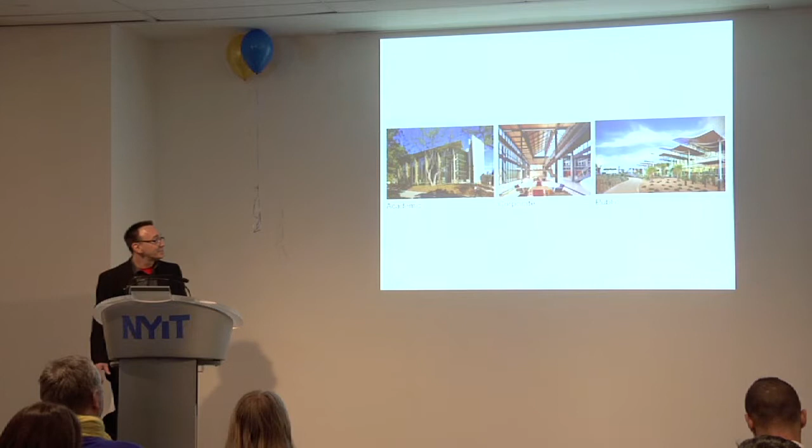Again, back to the main topic, or at least my view into the evolution of glass from an interesting seat that I got to be party to in my career. I started with glass early on, when I first graduated from college. In 91, I started full-time, but I was working at Bohlin, Cywinski, Jackson in 89, 90. Hopefully everyone was born by then.

At that time, in the early 90s, a lot of glass was going high performance: coatings, tintings, frittings. Most of the glass technology being given to the architectural industry was based on automotive products, because glass production, engineering and research go where they sell the most glass, which at that time was the automotive industry. In 97, we started the Rakow Research Library project for the Corning Museum of Glass.

Then during my career, I went from the Rakow Research Library project to work on the Pixar animation studios, and then a bit on the early Apple stores. The Rakow Research Library is an interesting project because it's an adaptive reuse, and it was a really great client to have, especially if you have an interest in glass, because their subject matter is glass. So when you propose a solution to do something interesting with glass, they're a pretty willing participant and interested to have the conversation. If you have curious leanings about glass, they not only are willing to engage in the discussions with you, they can bring some intellectual resources to the discussion.

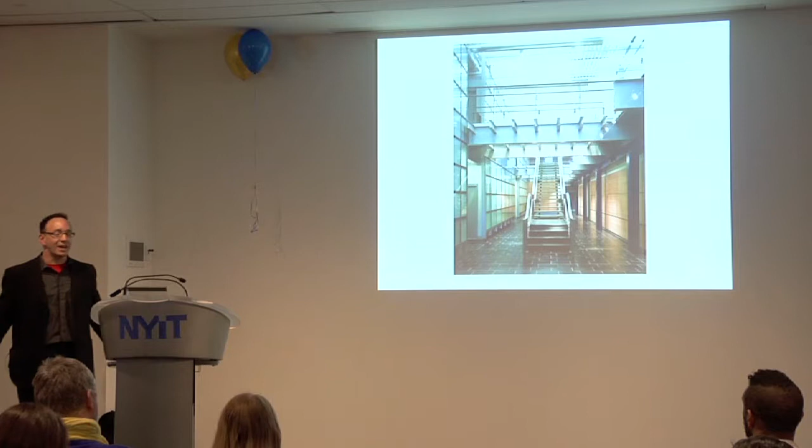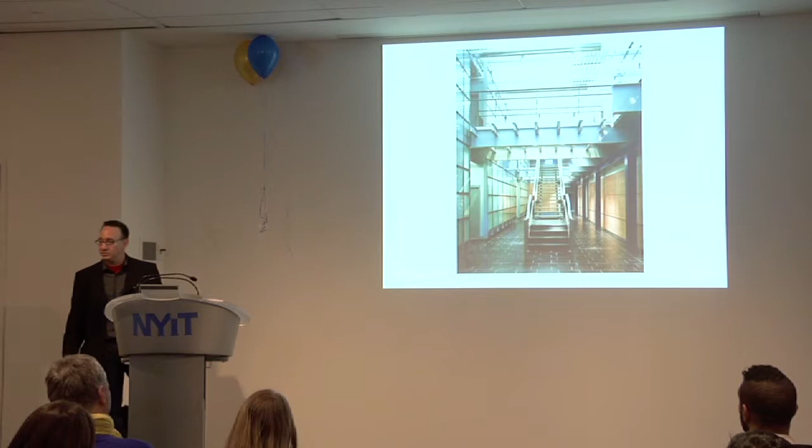We were also going into this 1950s, 60s building that was not, let's say, the highest value when it was built originally. And by the time we got it 30 years later, it was even less valuable. So we did a simple intervention where the things we added were high value and often glass related. The staircase was brought in as a way to, one, talk about their subject matter, and two, bring people up the stairs.

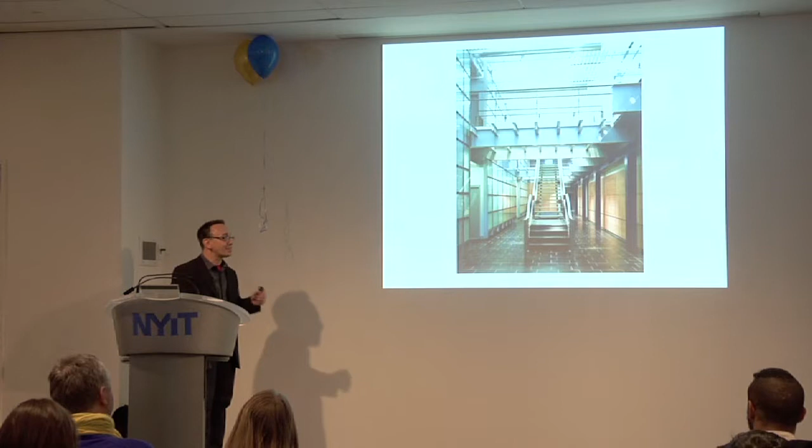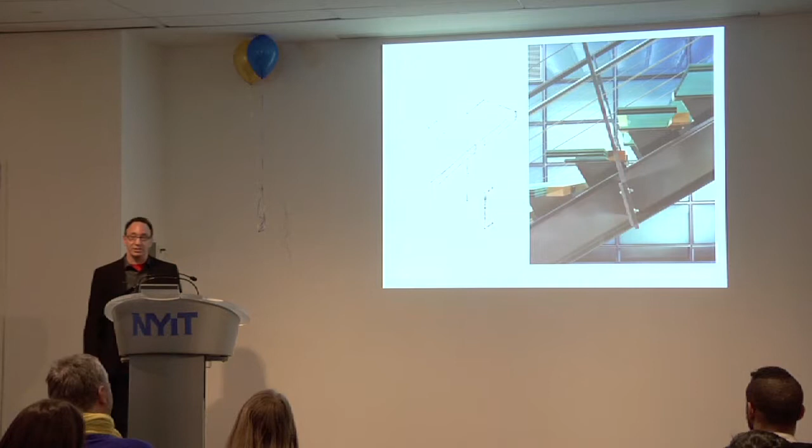We removed what used to be a terrible ACT ceiling. Basically, the scheme is a glass box within a box for the archival spaces. Again, with the subject matter of glass, we looked at how you would execute a glass stair, especially in the mid-90s. The evolution of the technologies we're using today is actually pretty stunning compared to where we were about 15 years ago.

And the willingness of people to do some of the things now with the interlayers and other technologies that allow us to do those Apple stores and other ambitious glass projects you see have been evolving for various other purposes, but have finally now hit a market where there's an awful lot of it available, and it actually is now competitive.

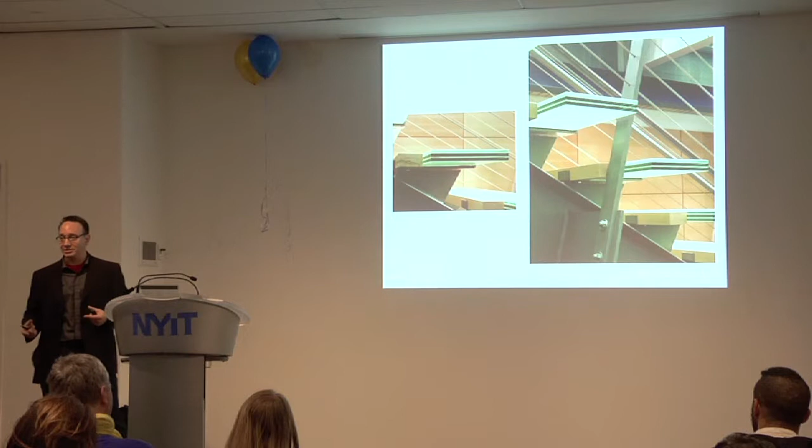In this circumstance, our goal was to have these glass planks cantilever past, so you would see the impact of the subject matter. In this case, it was a simple solution of a wood spacer at the point where you bring the railings past. The planks can be unencumbered, in their pure form. We don't have to cope them, cut them, or do any of those things. And you can celebrate a simple glass laminated plank.

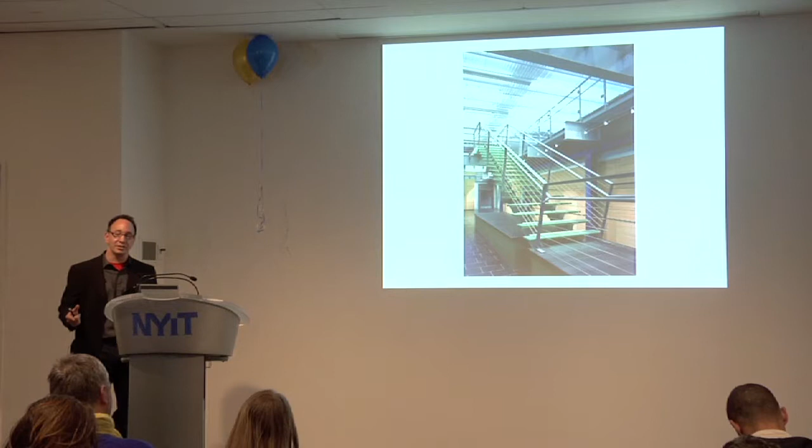Leaves us this unencumbered edge and sort of just this pure, simple form, which is all of the objects that we're putting into the sort of renovation of the project were meant to be sort of crisp and taut and modern glass related.

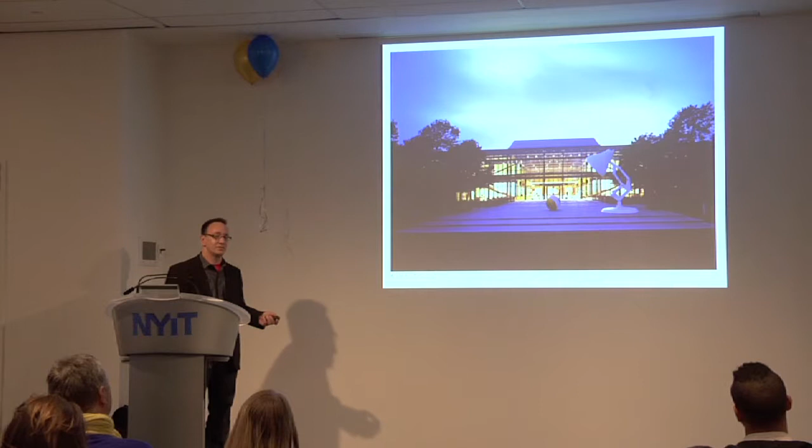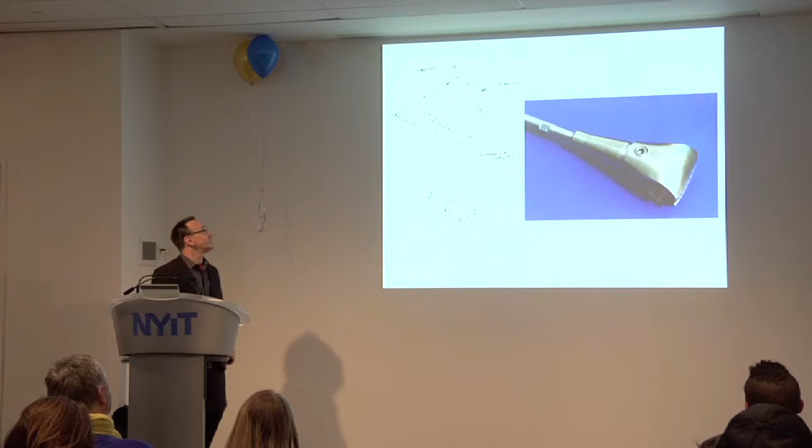The next project, shortly on the heels of that, we were doing the Pixar Animation Studios headquarters in Emeryville. And there was a particular part of the project that was a glass canopy. And at the time, the question was, can you do this in one piece of glass? It's about, if I remember correctly, 12 feet wide by 17 feet long, and in '97, that was not one of the sizes of glass that was commercially available.

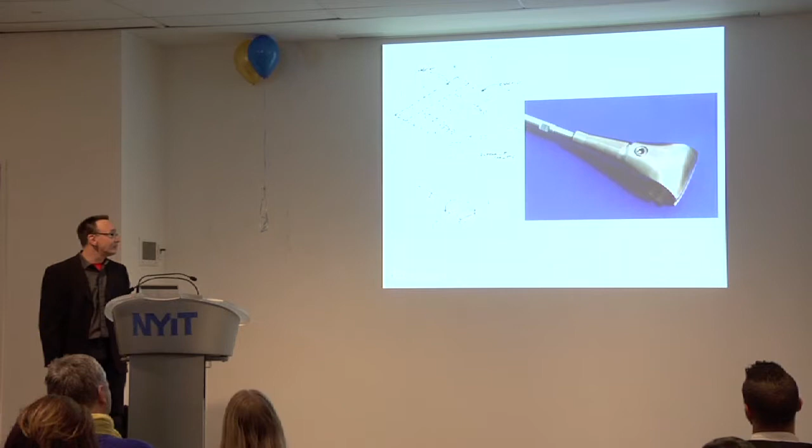So we came up with a little bit of a workaround, a simple solution of using very simple point fittings to just hold the glass, and then a custom fitting to pick the canopy up. Again, just trying to be as clean and simple as possible.

The Rakow project and this project is where we actually started working with James O'Callaghan of Eckersley O'Callaghan. At that time, it was James O'Callaghan of Dewhurst Macfarlane and Partners. And we also were collaborating with Tim Eliassen of TriPyramid Structures. I've had the good fortune of working with both of them for the last 15 years on various projects, both on the Apple side and some of the other projects that I've had the opportunity to work on.

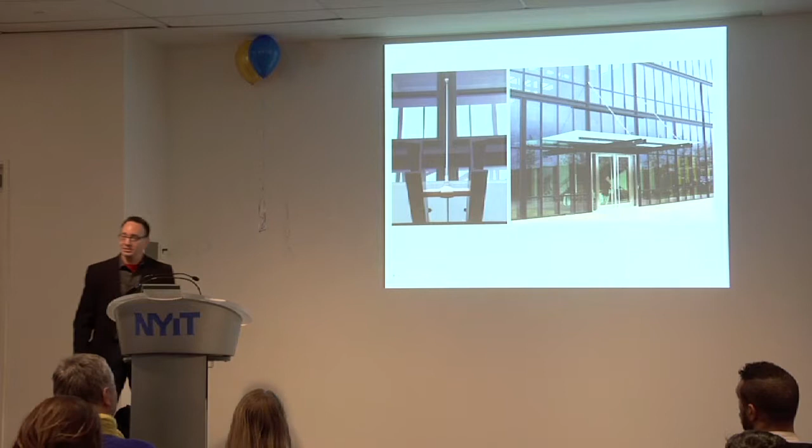Again, it's just a very simple solution, and in this view, it actually looks like it's one big piece of glass, which was the goal. Now you could actually just buy that piece of glass and do it with 4 points and be done, but in '97, that wasn't really available.

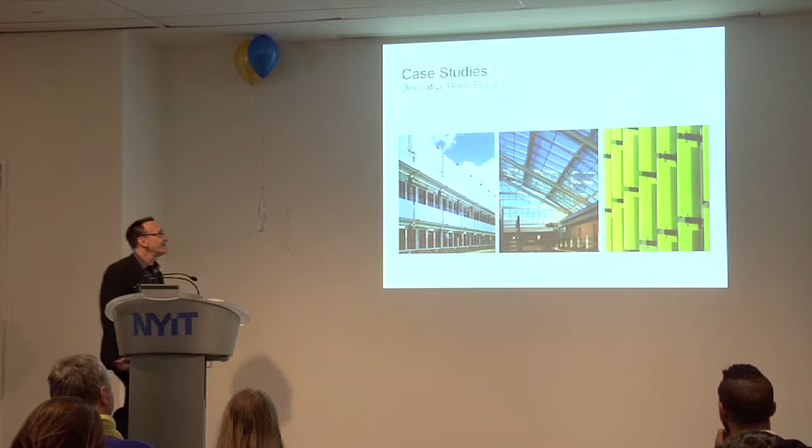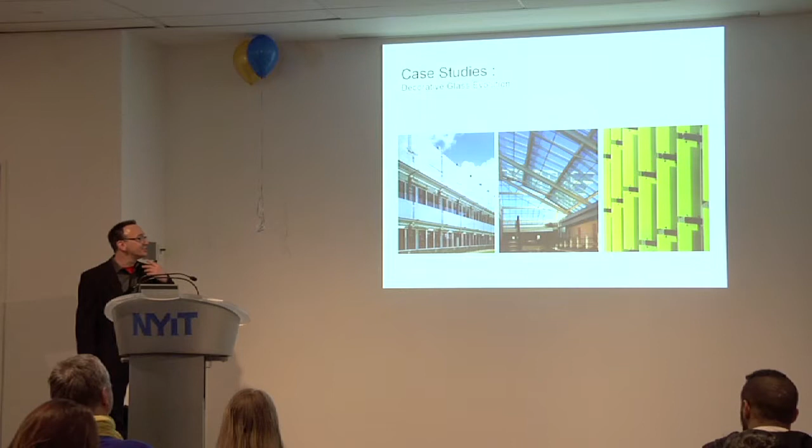So that brings me to probably the more focused part of the talk. Those projects, and certainly the Apple program, are sort of the transparent part of our practice. There's a lot of invisible buildings that we work on, cubes, cylinders, houses. But part of it is the visible glass or decorative glass version, which has its own interesting evolutions too. Again, the Rakow Research Library project.

And here's a question I'd like to ask. Does everyone know how you count the surfaces of glass in a window? Does anyone know? Brigham, you better know. Go ahead, Ed. When you point your finger at the glass and see how often it reflects. Okay.

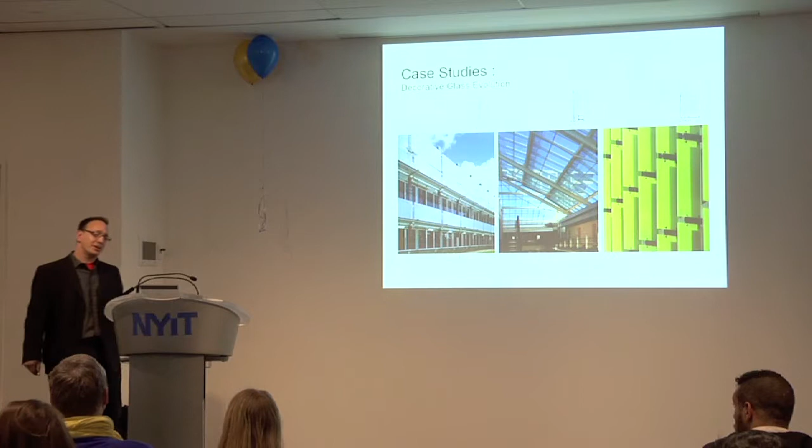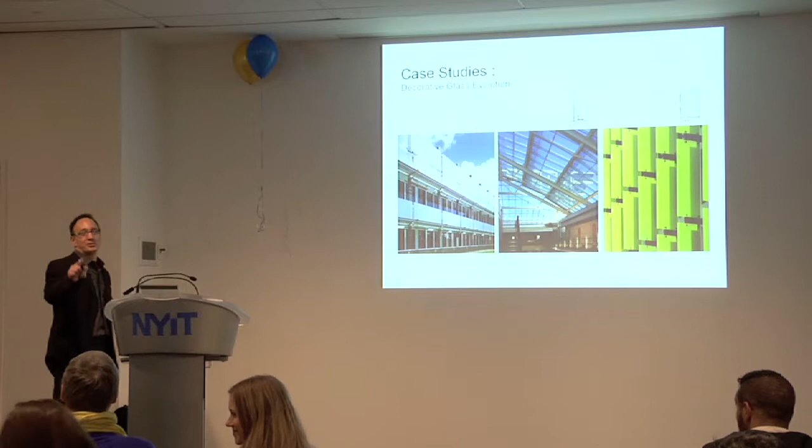Not quite as good at the grades that you gave. Yeah, it's true. When I tried that in your class, I don't think I got that one right either, though.

So if you're looking at glass, insulated units, laminated, or monolithic, you count from the outside in. So this is kind of fundamental because I'm going to be talking about the different surfaces of glass for the rest of this presentation, so it's kind of a key thing to know.

I actually gave this lecture, Brigham, you'll get a kick out of this, in one of our own offices that do a lot of ambitious glass. And at the end of the discussion, someone came and said, "Oh, I didn't really realize you counted from outside in." I'm like, "You've been sitting here for 45 minutes. You just didn't ask." So I've thrown this in.

You count from the outside in. First surface is exposed to the outside. Second surface can be exposed to the inside in monolithic in a standard window or laminated skylight, first, second. And usually if this is a single layer of 6 mm, quarter-inch glass, it's 3 and 4. These sandwiches obviously can grow and become more developed depending on how many laminate layers you put in, whether you have triple insulated. There's a lot more complexity and sophistication in it.

And the question that came up that started with this one, the Rakow Research Library, and continued through all of these projects is, if you want to treat both sides of the glass, how can you do that?

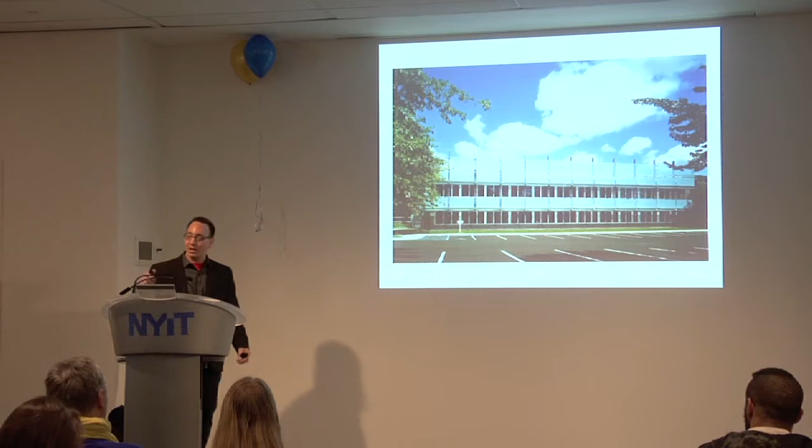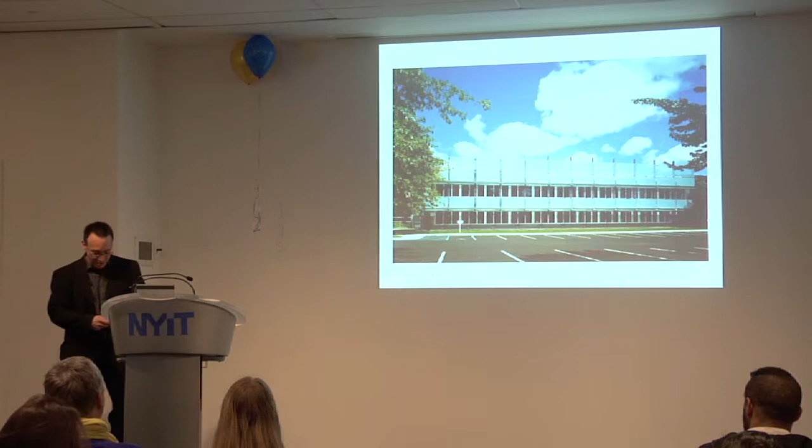So the question is, when posed in a certain way, if you say, I'd like to frit both sides of the glass, the immediate answer you get is, well, you can't. Okay. The question is, why? So Frank Grauman, a principal in our Philadelphia office who worked on this project with me, described it this way.

Well, you can't frit both sides of the glass because that would be like trying to make a pizza with sauce on both sides. Right? It goes through the oven. So to get the second layer, you can frit the first side, but you have to acid etch or treat the back side in another way. Now, and this was in '97, most clients will not typically accept, or most glass manufacturers, fabricators, whatever you want to call them, will not usually warrant something that's exposed in those methodologies.

There are now coatings that if you acid etch or sandblast or do these other treatments you will apply them, but they often will need to be reapplied. Most people are not as interested in taking the risk for a long-term building to have that sort of liability out there hanging on a 120-foot long building, 4 stories tall, 100 stories tall, whatever.

But if you ask the question in another way, and you're talking to people who actually make glass for a living and have a lot of intellectual property rights, you can have a discussion about, would you mind if we frit the front and etch the back to do a custom piece of solar shading device? And that's basically what these panels are. We did both empirical and mathematical equations to figure out how we were going to space these lines.

And as this diagram is indicating, the goal is that the sun can't see into the books, and the people can look through the windows out to the view. Pretty simple parti. Except we wanted it to be progressive, and we also wanted to see the sky. So we calculated the panels. We did mathematical testing, and then we actually built 12 by 12s in our own office with paint and tape, because we're clever. It was a big weekend at the office, trust me.

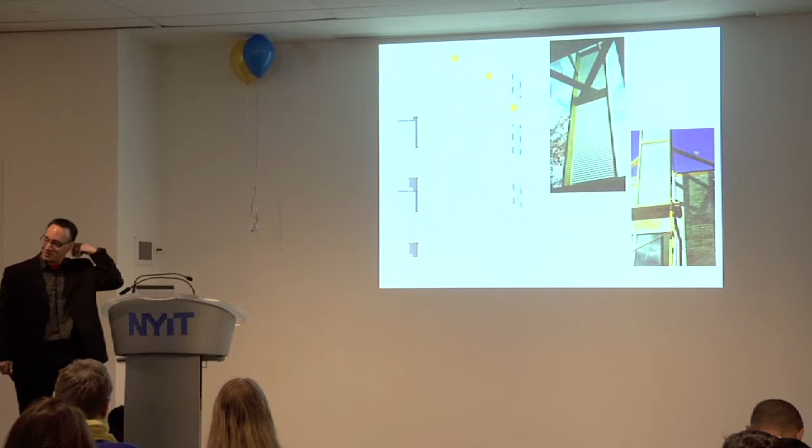And you hold them up, and then you're walking around, and you have sun, and then you put lights on them, and you try all these interesting things. Sometimes late into the evening, which then leads you to other interesting thoughts.

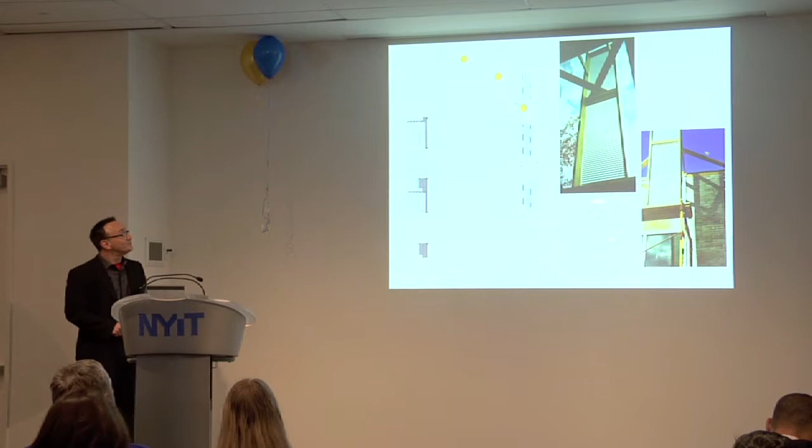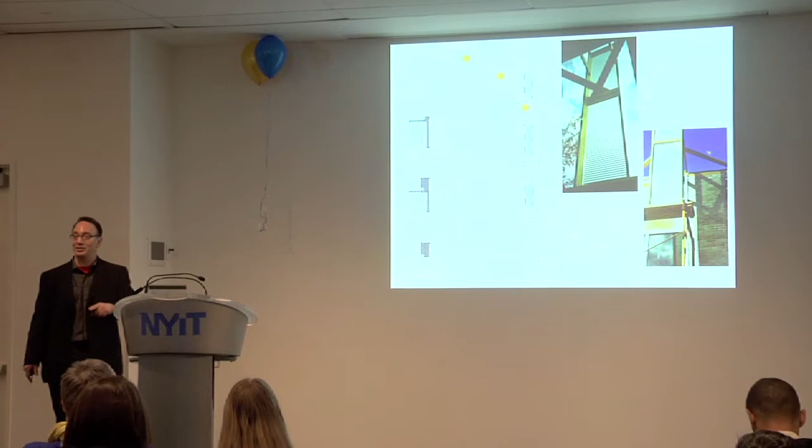But once we thought we got it right, and we did those mathematical equations, with a very long string of decimal points figuring out how exact we were going to make these, we had 3 of them made and installed exactly where they'd go, to truly mock it up. Because what I've truly learned, if you're going to do something with glass, having full-size mock-ups, at least a swath of it, is critical, because you can never really predict exactly how that glass is going to perform.

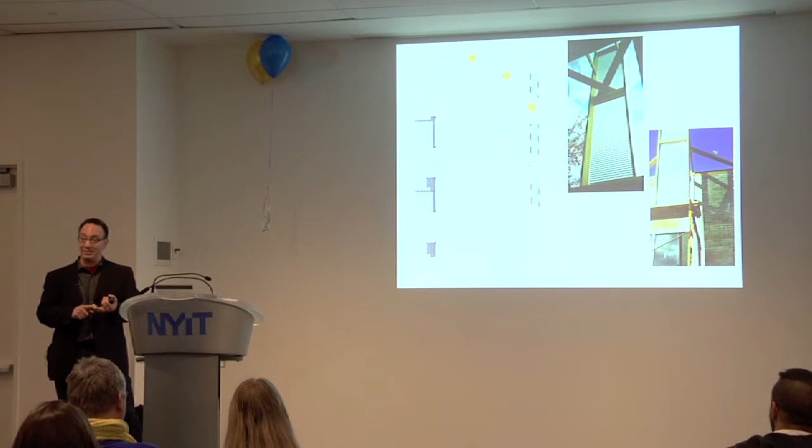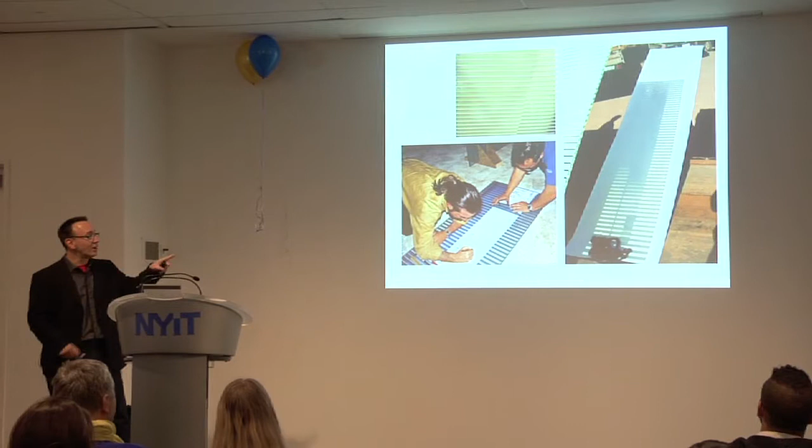Just the color in different regular annealed glasses and low iron glasses is stunning if you put big pieces of them next to each other. So it did not work the first time. They could not fabricate the panels to the tight tolerances we were exacting from them, because when you do a 12-foot stencil on a 12-foot piece of glass that's 6 feet tall, and you pull it on both ends, the fabric stretches, so then it waves. So then the lines don't align, and it's also not repeated on each one.

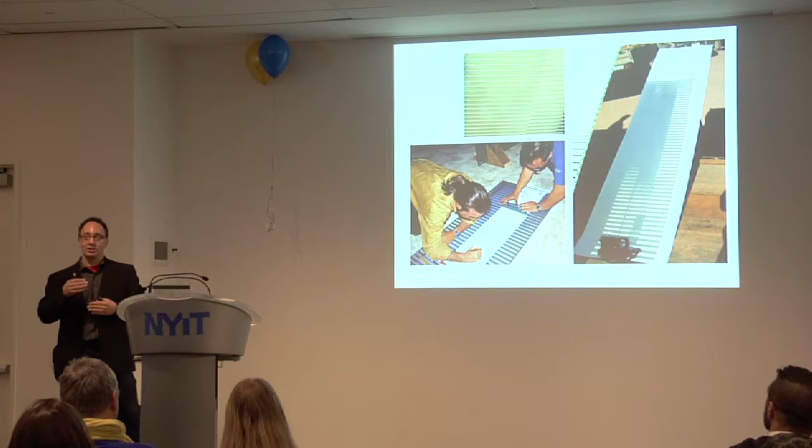So two things we learned. One, that was a problem that we didn't anticipate at all. And two, we needed to give a little more breathing room tolerance for the lines and get them to overlap. Our exact perfect application in real life needed to have more tolerance built into it for fabrication, installation, and just human nature.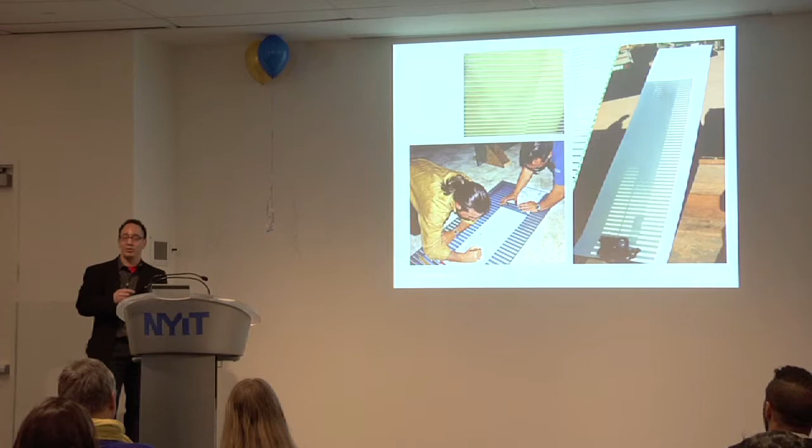So this is a much younger version of myself and colleague Steve Chato, principal in San Francisco.

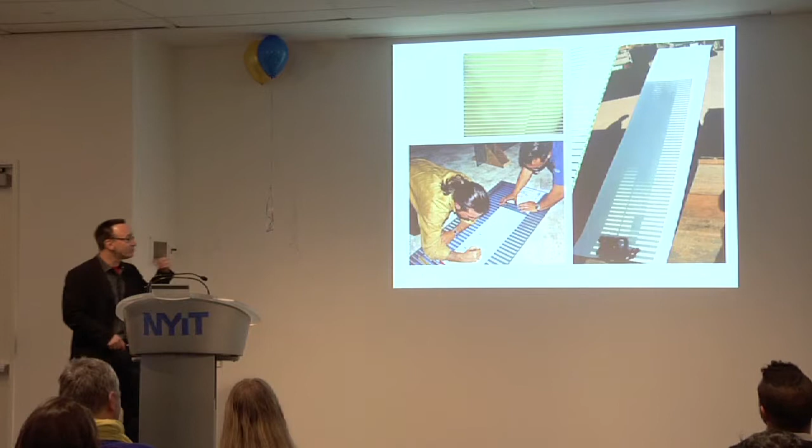We're basically using the glass as a shop drawing where we want the new lines on it and saying, hey, can you make one of these? So they did. And then we went out, put this on the back of a truck, and drove around in Calgary in April, which is like going to find winter and praying for the sun. And it did actually work. You get this moving, this simulates the original. This one is the A panel, and this is the B panel.

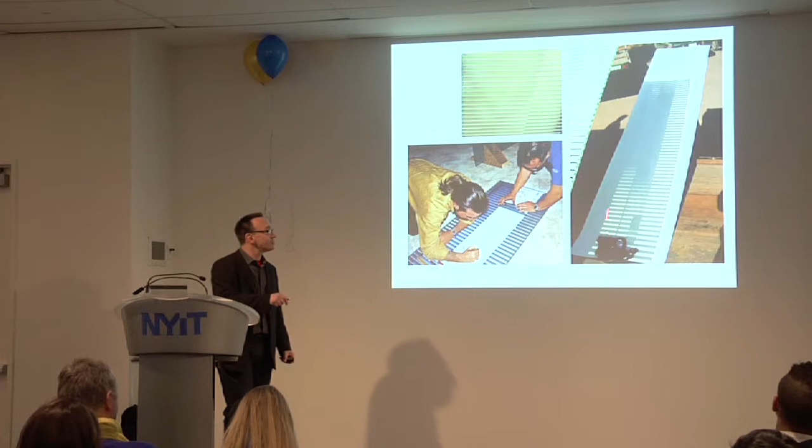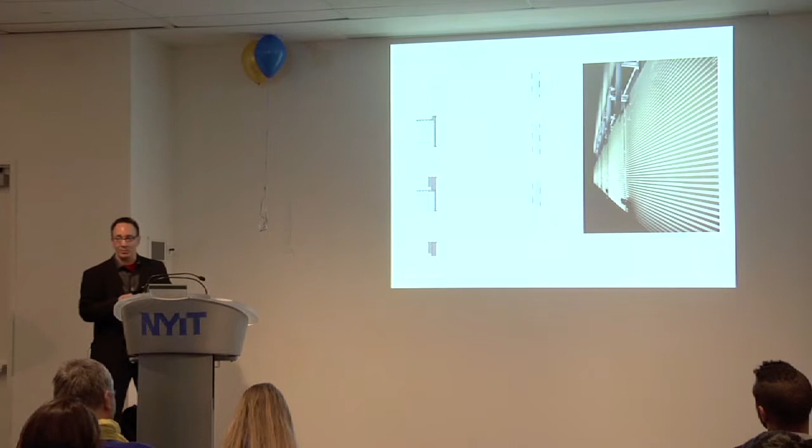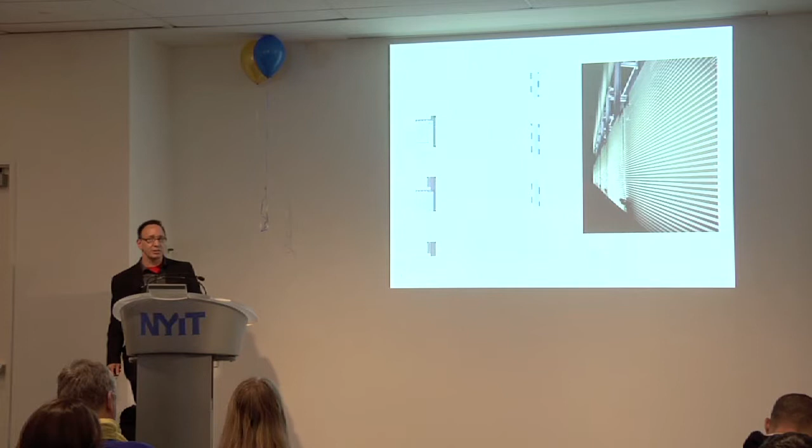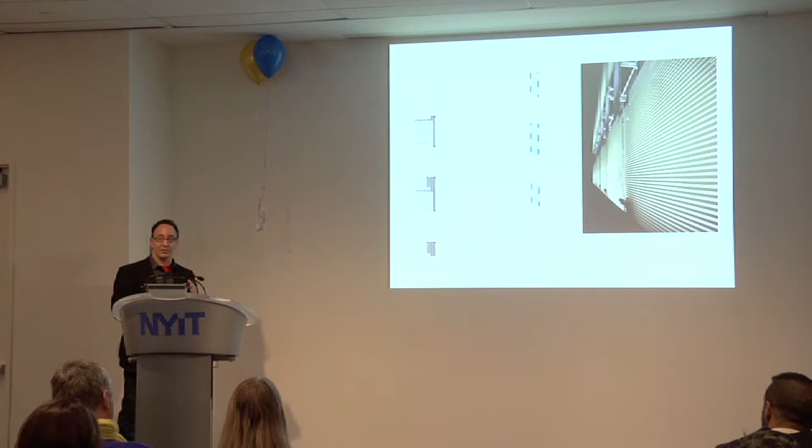We also then looked at the various math and equations and worked to figure out what is the optimum line spacing, because that shadow, as you saw in this image, will not cover the entire 5-foot window throughout the whole day. But you figure out what is its maximum shading, and you live with the margin of sun that comes through it. And we then looked at, well, the other impact of the screen wall is actually backlighting at night, so it becomes a lantern in the landscape. So we basically optimized the angles based on where we would set the lights and worked those math equations back and forth until we hit what we thought was a pretty good compromise.

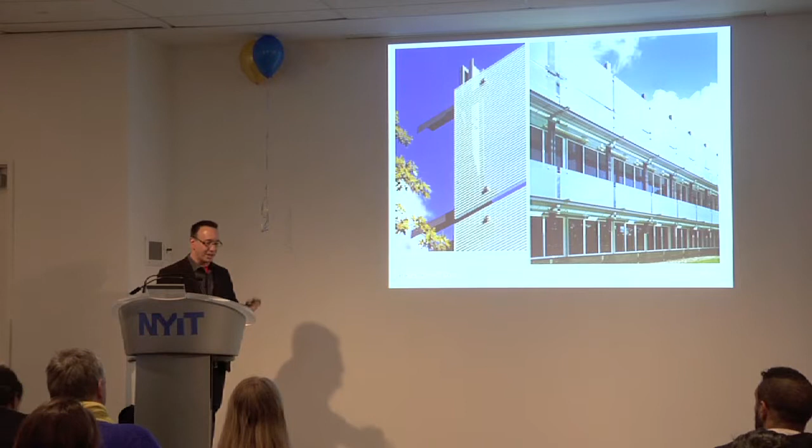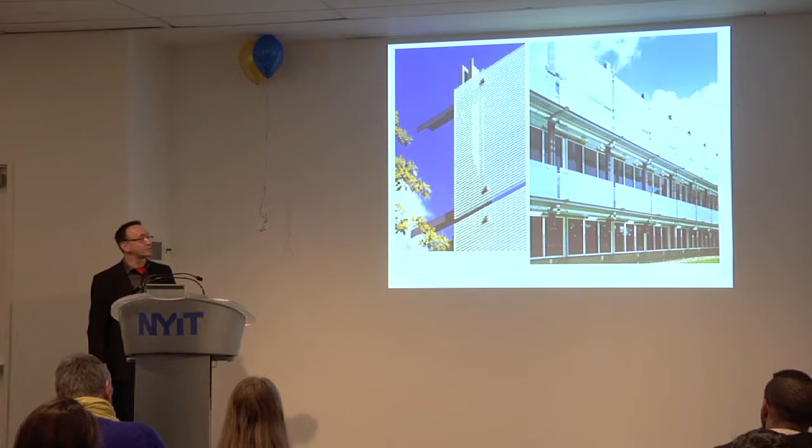And at night, this is the reading room and the lantern. And some day, I believe that will eventually become park, as opposed to parking.

The next sort of project related to glass, and this one's a little more straightforward and simple, but is actually our alma mater, Rensselaer, the Biotechnology Center. It's a 260,000 square foot, 220,000 square foot science and technology building, primarily wet biology labs with a lot of office space. It's fundamentally a 3-building partie. There's the historic facade of office spaces that run down 15th Street. There's the modern part that turns into the quad, and then there's an enormous machine for research behind. And the skylight is sort of the bridge, natural outdoor street between.

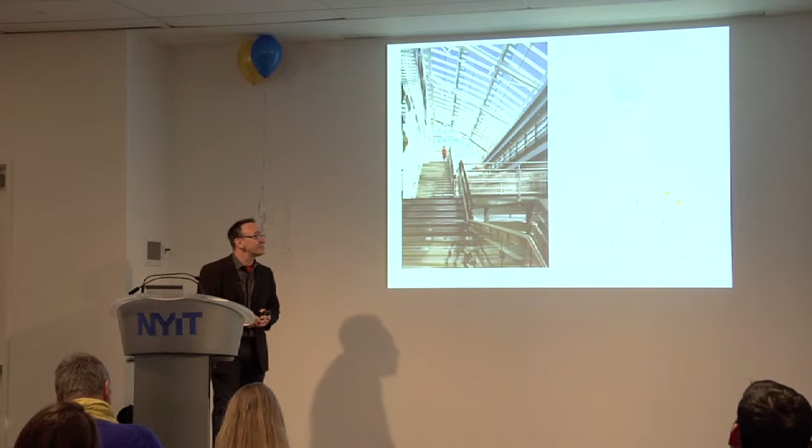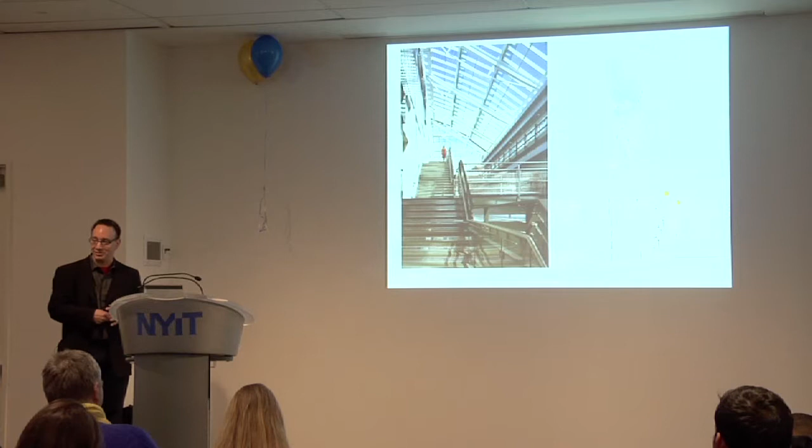And the real objective was to be able to create this space, keep it naturally ventilated so we didn't have to invest in air conditioning, and give people in upstate New York, the students, a nice indoor space for many of the months where it's not so nice to be outdoors. To achieve this, we invested in a VE52M product from Viracon. It's a Ford blue, highly engineered, older technology blue glass with a 2M coating, which at that point was their best performing low-E coating with minimal reflectance.

And then we actually added 3 different densities of frit pattern to it. And in this case, it's that story again. Where are you putting the frit? In this case, you put it on the second surface inboard of the light. And then the bottom pieces of glass are laminated together for safety because it's a skylight. That gave us the coverages we needed that allowed the CFD analysis model to show that we could naturally ventilate the atrium space and not have to provide any air conditioning and simply do it by inducing draft with the smoke evac system that was in there, thereby saving the entire cost of investing in air conditioning for, what do I remember? It was about 45,000 square feet of space.

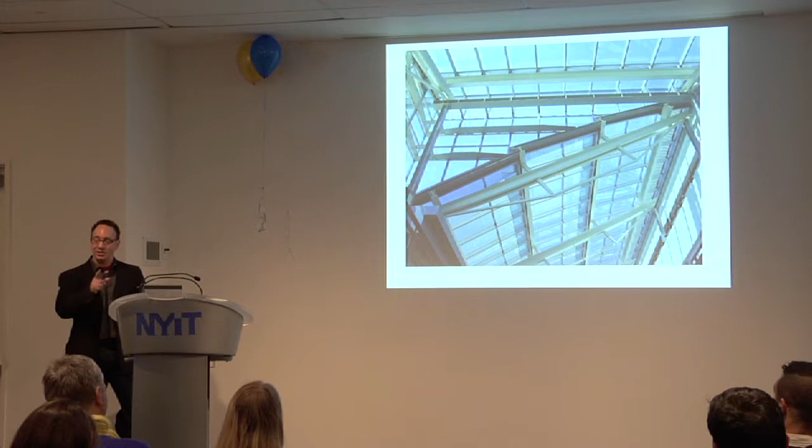It's the sort of three planes, and they come together in this interesting knuckle space. And again, it's three buildings moving separately, and New York is actually a seismic zone. So this corner is an interesting kind of Vierendeel truss on its side, and will bend and sway, and it's actually attached to the smaller building and just rides against the top building with sort of a slip fitting.

The real item we were struggling with in trying to figure out the aesthetic of this was actually figuring out how you can get a consistent look even though you have 60, 40, 30%. And we did that varying those two little lines between the reoccurring larger 5/8" line.

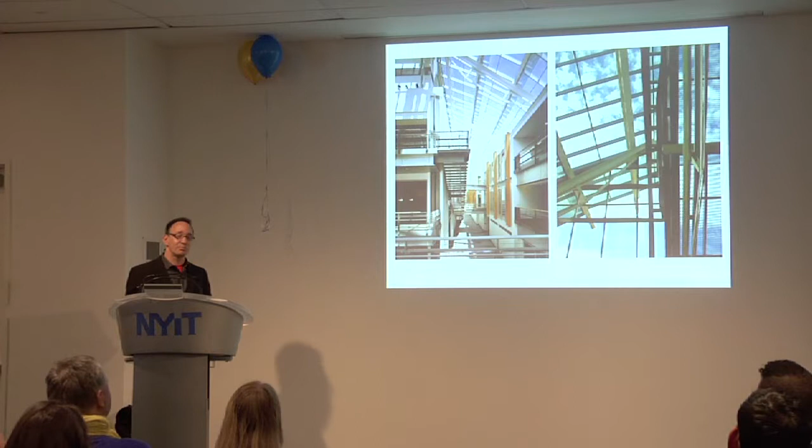We think they actually provided two benefits. One, it gave us a constant kind of view from inside the space, and more importantly, also at night, it gave us a sort of a reflector to bounce the light down, because we were basically bouncing the light off the skylight back into the space at a low level.

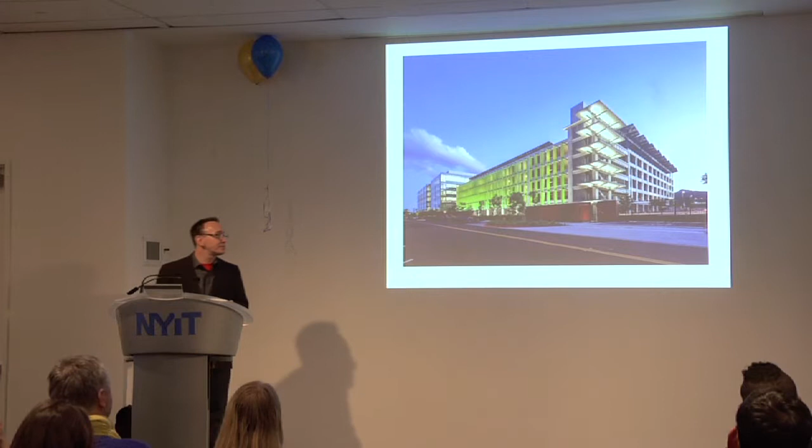The final sort of case study is actually this decorative glass project for a corporate client out in Southern California for Creative Campus. It's a 7-acre site, part of a larger campus. 7 acres, there's a parking garage and a building with amenity spaces in it and some existing buildings on campus, and this was our whole site.

And the mission of the glass in this case was less performance-based from a solar thing, but actually as a unifying factor, sort of wayfinding and campus building. So we have these 5 different points of sort of intervention of the glass and decorative glass in this case. And we had a concept of a gradient, color gradient that starts at blue and ends up to yellow to white. And we looked at different technologies that were available to us.

There's various ones. There's direct print to glass. There's printing on PETs. There's printing on PVBs. And there's a few other ones that, in all honesty, I can't remember. And I will ask them, and then someone will say something, and I'm like, well, that's not what the other rep who's selling me the same product said. But anyway, it's an emerging technology, and we looked at all of them.

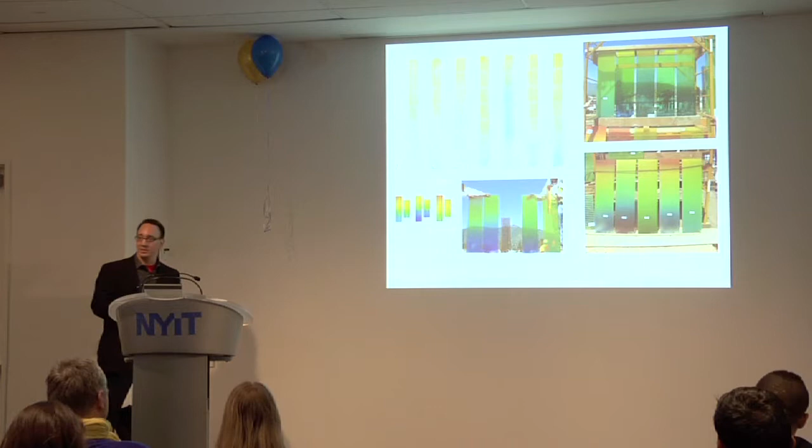We started off with a color scheme and trying to determine both color gradient and density of color gradient, because that's actually a variable. And what I find in this technology at the moment, it is certainly getting better, but if you try to print your document from your home computer and then try to print it at school, print it at a friend's house, it doesn't always come out looking the same, especially if it's a full bleed color graphic. The same would be true with these giant printers that they're using for any of these technologies.

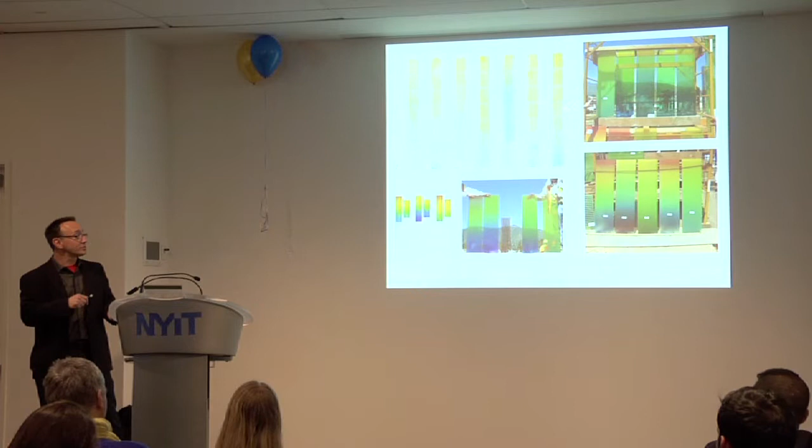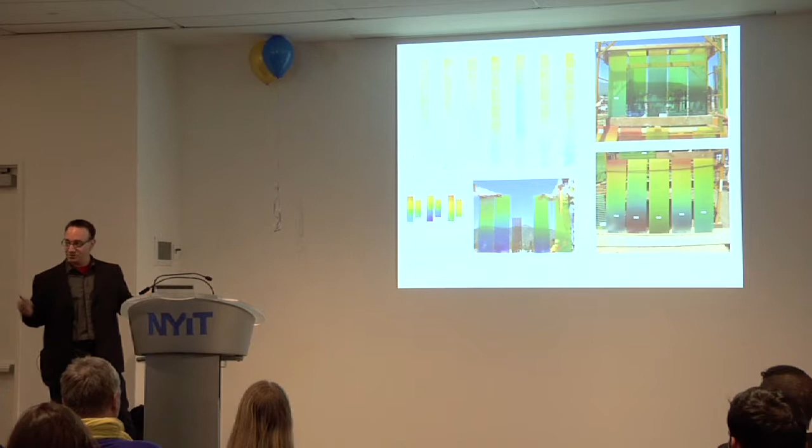So our investigation started with watercolors. We had samples made. We made digital files, so we created the custom artwork in Illustrator for the project at full scale, which is 7 stories. And then we ordered panels from 3 different vendors, 4 different technologies, and as you can see, none of them matched. They all get the same digital file. And so that made us wonder, what's that about?

It's a good question. And then you would ask them, so this one in the middle actually is a custom frit first surface, doing a custom graphic as one exploration. But all of these things, we had 125, 150 samples. And there couldn't have been more than 6 that matched each other. And those were in pairs of 2, not pairs of 4, because, again, we ordered 4 of each set.

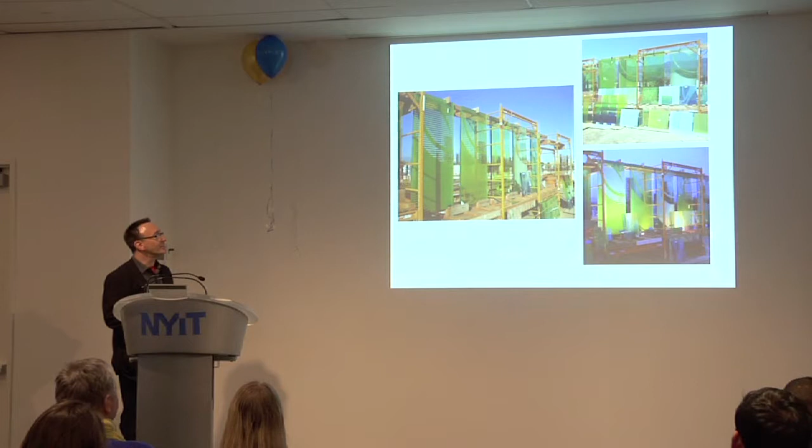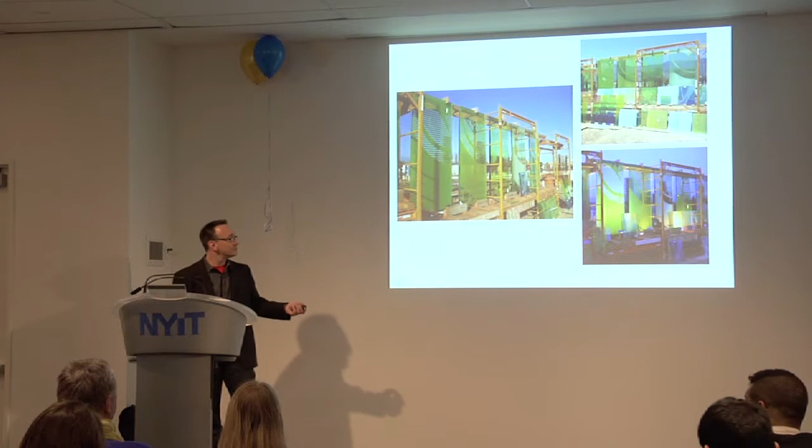Interesting. So we looked at them in daylight. We looked at them at night. We looked at them backlighting. These explorations are a bit into the color, the line thickness, which type of first surface treatment you're getting, whether you're doing acid etching, sandblasting, etch frit, and true custom acid etching, which is only available outside of North America.

There we go. So back to the watercolors and the constant gradient. Because it wasn't complex enough to do it with watercolors, we thought, since we have 6 surfaces to work with in our general palette, we'd at least use 2 of them to make 2 different color gradients based on the same pattern, but accelerate the color gradients past each other so that we'd get more richness and variation.

It's actually much easier for me to say, which I obviously did not do very well, and it's even harder to pull off. We looked at these line spaces and trying to figure out how dense do you want the line work and how do you space that? And then we also had this other interesting circumstance come up: we started layering cost into this, and panels of glass and layers of glass, so then not all pieces of the glass on the project were going to have the same layers. The primary one we did is 3 layers of glass.

It was 19 mil, 6 mil, 6 mil. We have other ones that were just 6 mil, 6 mil. We have ones that were 12 mil, 6 mil. How you combine these different color gradients when you compress them, and then there's this interesting debate about if you have these 2 different lines, and we were staggering them because we learned at the Rakow project that you

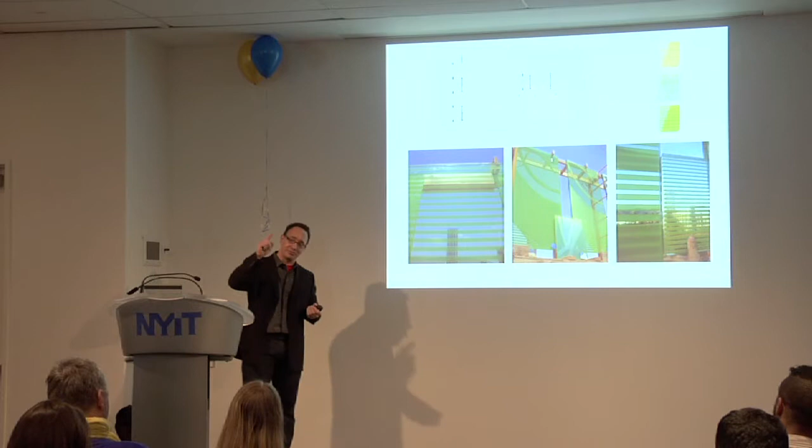need to have an overlap of them when you put it through, because the refraction in the glass will play, and the way your eye closes the gap when looking at it, you need to actually overlap them so you can get either the closure or the openness you're trying to achieve.

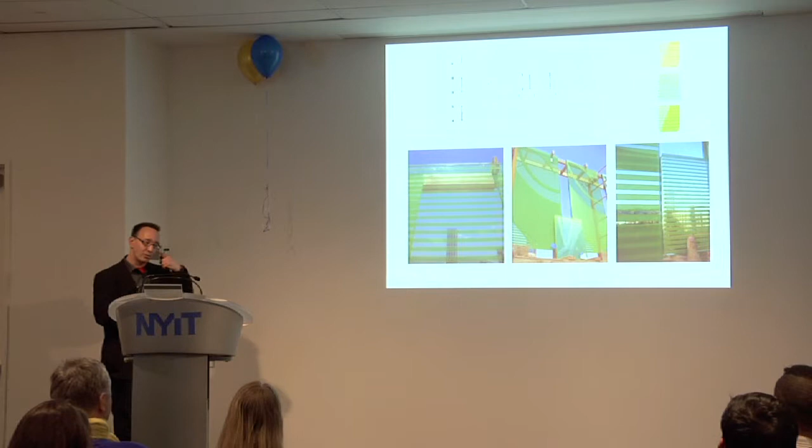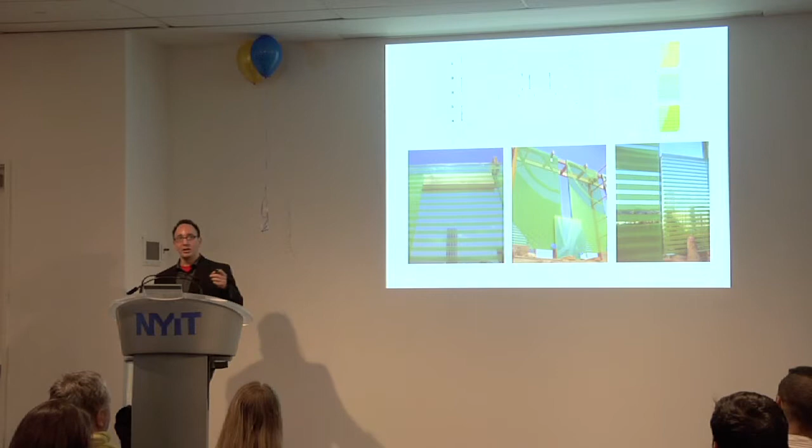We did settle, I'll jump back for a second, we did settle on the thinner line work. We looked at the larger ones. These are much closer to the scale of the ones at Rakow and at Rensselaer. But this pattern is the one we actually believe gave us the maximum color from afar, but the minimum blockage when looking through it when you are up close. And we tested that a lot, both. Again, you have to test it at full scale.

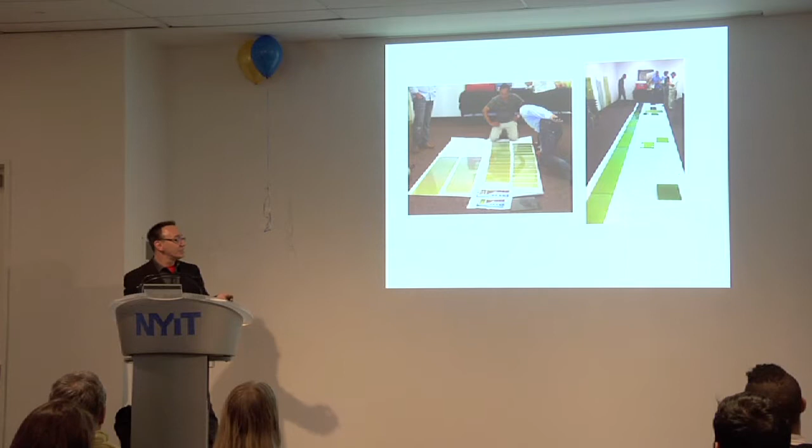And then we realized that you do need to engage a fabricator and start syncing your software and your color gradients to their technology. And that's where we started. This is us looking at them full scale height, printed out, and trying to match. And these are 12 by 12 panels. It was a pretty large collection of glass, decorative glass.

There were 5 distinct elements. There were 2 sides to most of the elements, and some of them had 3. And this is sort of just tracking each of them, because each of these panels across here get a custom artwork. And these panels are for the parking garage. There's actually 132 of them. And there's 4 different gradients, but they scale around.

So we started then also making shop drawings for them and looking at the different layers and the colors, and then some of them are opaque, some of them are acid etched on the first surface, again trying to create these different densities or use them as either blinders or different visual cue devices.

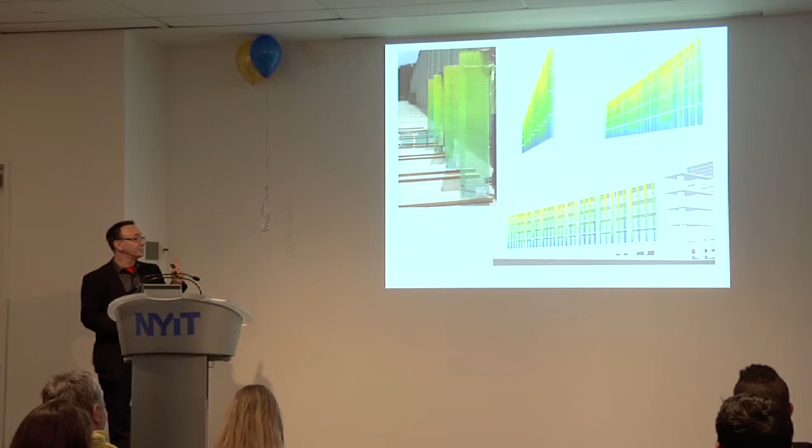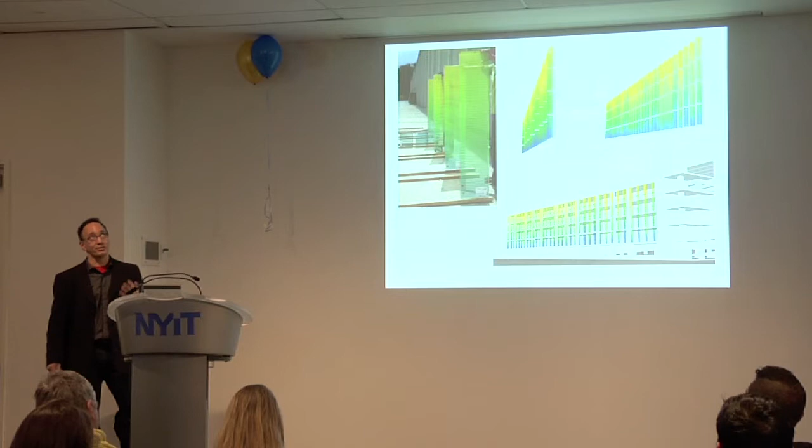The parking garage is a very straightforward structure, but the goal is to give it a lot more life and make it an element when you're coming in off the freeway so that you can see it and you kind of know your destination point. The explorations into detail line work.

And then the shop drawing process comes in and you start trying to account the 12 by 12s, and this represents a 10-foot panel, the bottom 5 inches of it in blue, and this is what the top 5 inches would be, and then our goal is to align it so it's a constant gradient all the way up through the panels.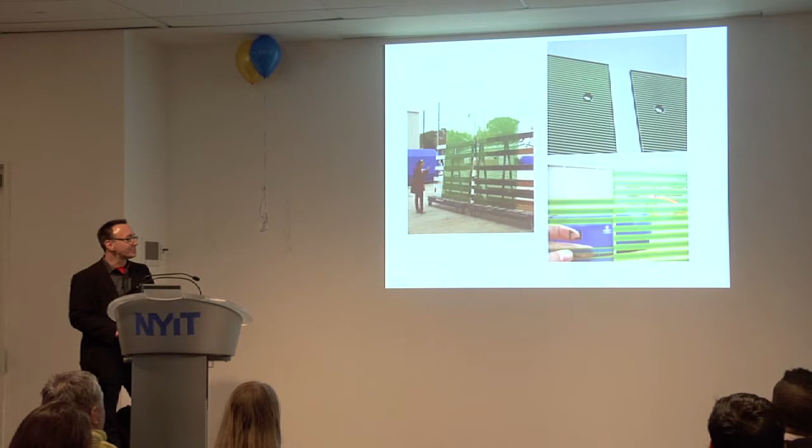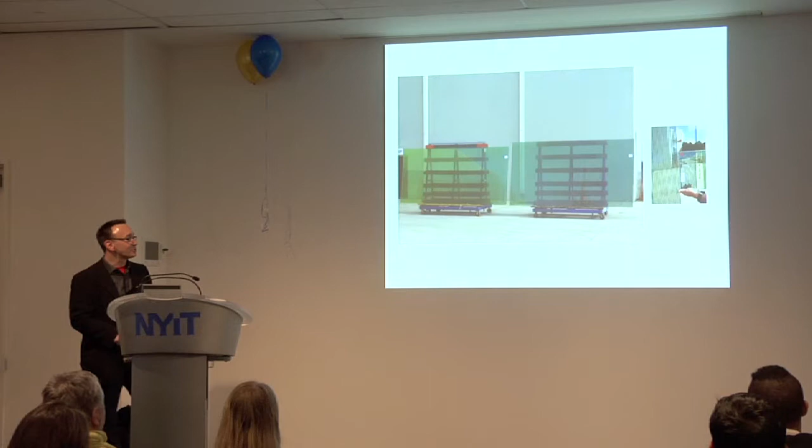Full-size mock-ups, testing them and looking for the various abnormalities that show up in this large-scale printing process. And we had a few that showed up. We were testing the color gradient versus a collection of baselines. And then we put them on the side, and that's the panels for the main stair. Seeing if it goes from blue to green. There's our control samples. This is our mock-up.

The first one did not actually appear as blue. Again, getting full-scale mock-ups is important if you're trying to determine how blue something looks in what is otherwise a fundamentally green substrate of natural glass.

The panels were pretty successful. They do work as these wayfinding devices, and when you're on the campus, you can actually kind of find your way around towards the major vertical circulation points of what is otherwise a 7-acre site. This is one of the entry pylons. It is actually opaque. That was one of the color patterns that I showed in there that we actually filled in the back line in the B layer.

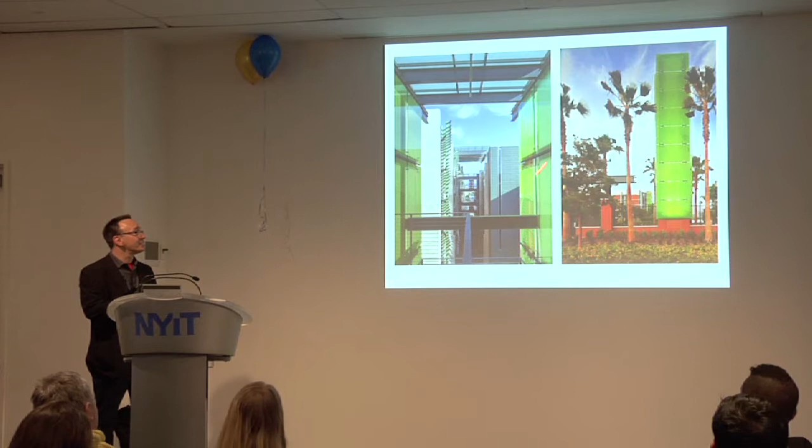This pattern is identical to the one on the left. The one on the left, let's see, as you can see, looks up to the mountains. The one that I was showing you on the right is actually acid etched so that you cannot look down into the loading dock. So this is the acid etched side, and this is the more transparent side. Looks up to the mountains.

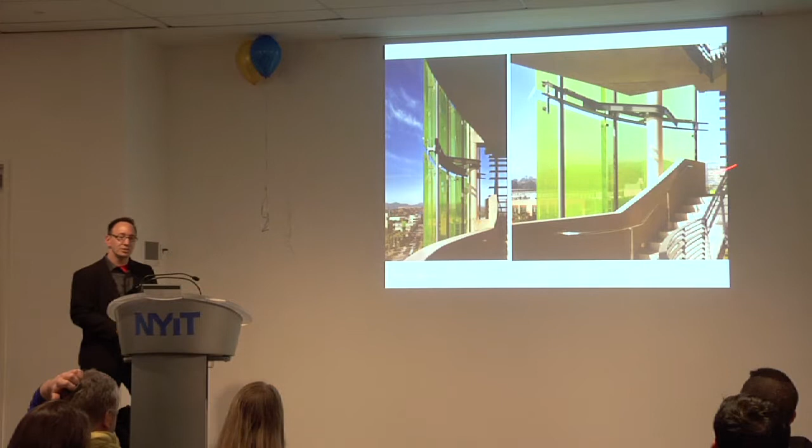The main stair, again, you want to be able to see through, but from afar you'd like to have as much color impact as you could. That was the balancing act we were working for.

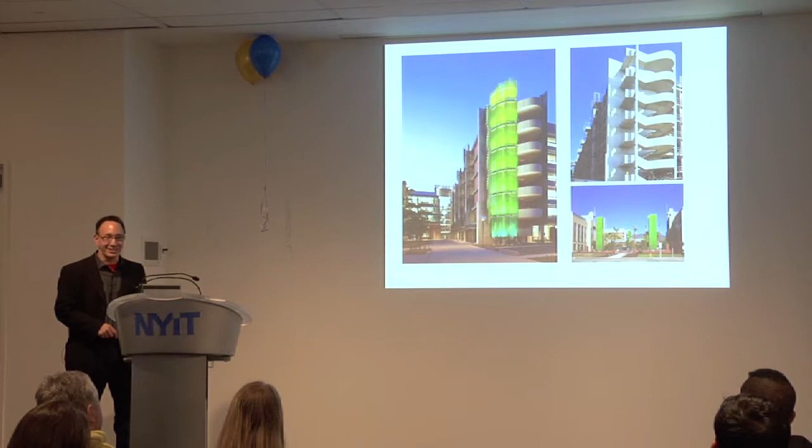The main stair on 7 stories on the end of a very long concrete frame building in a seismic zone also was a little bit of a challenge from a structural engineering standpoint. And we were fortunate to work with Tri-Pyramid, who supplied some amazingly nice fittings that take up that seismic restraint, because if you put large panels that weigh about as much as a Volkswagen hung off the end of a 7-story building, there's about 3 inches of movement.

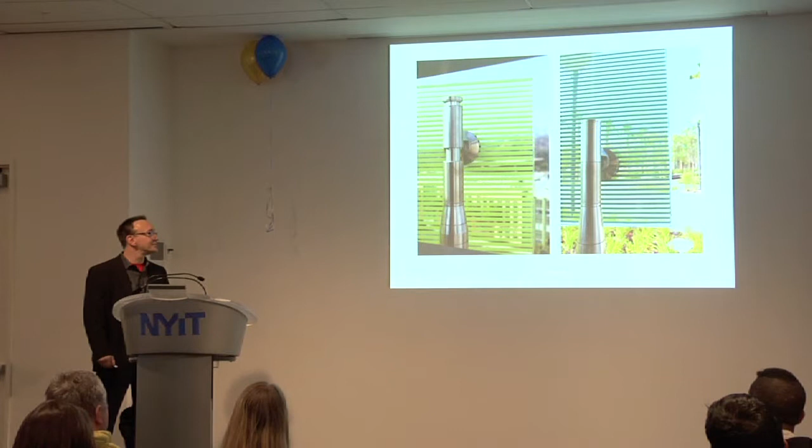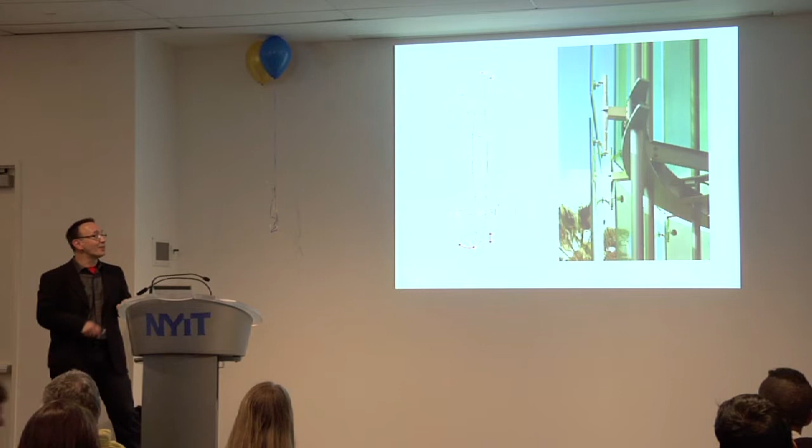And of course, to make it simpler, we also shingled the panels. So there's this interesting challenge of front and back, side to side, up and down movement that needs to be accommodated into what we affectionately called the boomerang. These fittings are really interesting industrial design pieces. Again, the garage piece with its varying, very subtle layers of green. Both panels are acid etched, so at night they actually glow.

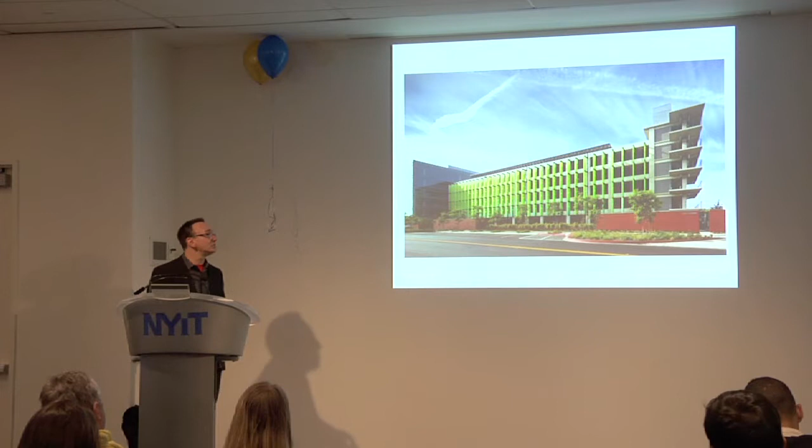This is another sort of exploration that I've been fortunate to be part of. Starting is the Frick Environmental Center that we're doing out of the Pittsburgh office. It's going to be LEED Platinum. Its mission is education. It's for the Pittsburgh Conservancy, and it's their environmental teaching center at historic Frick Park. The project is also a Living Building Challenge project. We're hoping to achieve that rating after it's completed. One of the components of that is sort of a teaching and learning process.

And in our building, for energy consumption, we're actually using phase change materials. And we're working with Dale Clifford, Biologic Design Group, who is also a professor at Carnegie Mellon in Pittsburgh, to develop these phase change material demonstration tiles to try to educate people to the idea of captured energy. It's a project that we've just started, but I think it's going to be pretty interesting and pretty promising of where that could go in the future, using phase change materials besides doing them in sheets the way they do, and there's people doing other biomorphic products. I think the idea of being able to celebrate them within a facade is a pretty interesting thing.

Any questions? How do you factor in cleaning the glass as you're designing these structures? How do we factor in cleaning the glass? It is always a consideration. Depends. The larger buildings have dunnage that drops over the sides. Many of the smaller projects, 2 and 3 stories, you can get from a boom lift. The atrium has a special inside boom lift with an outrigger arm that we actually had to find a place to park in the atrium space so they can go up. Actually, they didn't ask how to clean the glass. They asked us how do we change the light bulbs. But same sort of thing, right?

I mean, it is an issue. We live in these buildings, right? And you have to be able to maintain them. That's important. And the ones that are maintained are usually the ones that people also like or love. Those are the historic buildings that have the longest permanence and have a real memory with people. So it's important to, one, make great buildings, but also have them become dear to their owners so that they are treated well, because it's a serious endeavor.

What are the costs of these projects just for the glass? Because I assume this last project, the Creative Campus, and the Apple Store are immensely expensive. Is it right that one glass panel at the Apple Store is like 300,000 each? Maybe.

In the Pittsburgh project, did you work with any of the Pittsburgh companies? I know there's a lot of glass history in Pittsburgh. They have PPG, and they're famous for the glass bricks. They're one of the biggest. You mean for the Frick project? For the last project you showed, the one in Frick Pittsburgh. It's actually out to bid right now.

Dale Clifford actually makes these mock-ups himself, and then he helps on the production side. So yeah, we are trying to leverage the historic glass-making industry in Pittsburgh and Corning and any of these other people that we know because they've printed big glass jobs for us in the past. We're calling them samples when we ask them.

Could you talk a little bit about the state of the art? Yeah, and also what you're most excited about for the future of glass, for the next 50 years or something like that. Sure. I don't know. Okay. State of the art. Wow. I actually find the print to glass technology, I think there's an awful lot of promise in that, just from a very commercial standpoint.